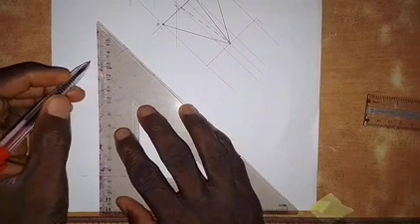So we are still going to draw a horizontal center line for the plan. We draw the horizontal center line and we draw a vertical center line. Okay, so we have the vertical center line here now.

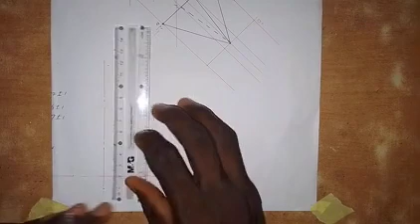So then we are still going to use the length of 50 millimeters for the rectangular base of the pyramid. So we have this is 25, we take 25, and here we also have 25, that is 50. Then we use 30 as the width, so that is 15 millimeters down, 15 millimeters up.

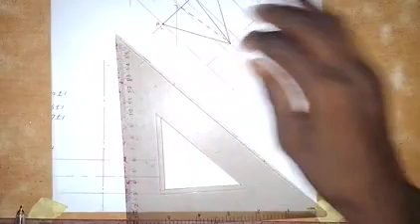So here we draw a horizontal line like this, and then coming up here we draw a horizontal line like this, and then we draw a vertical line here, making it a thick line at once. So we have this, and then we have this. We also need to make this line a thick line here, and also make this a thick line here.

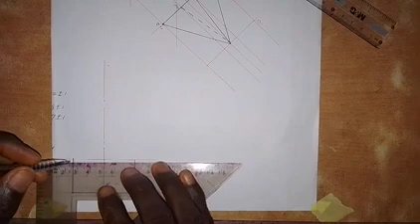Alright, so the next thing that I'm going to do is come up a little bit and draw a horizontal line here. So then the height, so we used 50 millimeters for the height of the untruncated one, so we still take it as 50 millimeters here.

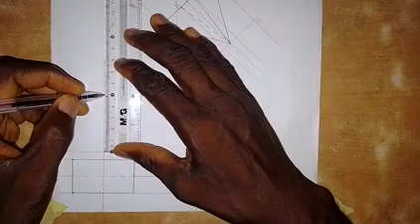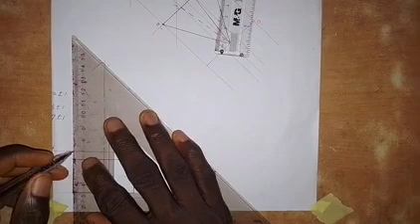So then we need to take this point up like this, and also take this up. Then we connect this point together. Okay, then we also connect this point together like this.

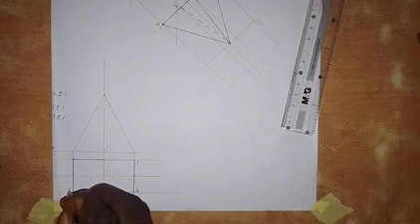Alright, so the next thing that we are going to do, I will number this point as point 1, this is point 2, this is 3, and this is point 4. So here we have 1 prime, 2 prime, 3 prime and 4 prime. So this point I will call it point 0, or point O.

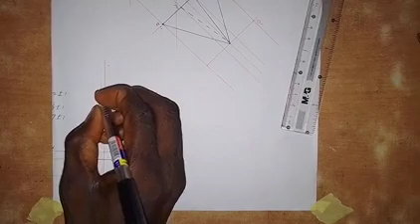So then we also need to connect the diagonals together. So we connect the corners together. So connect this with this, and we also connect this together, so with this.

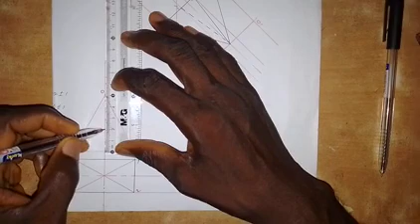Alright, so now if it is truncated, let's look at the point at which it is truncated. So let's take a measurement of 20 millimeters from the base. So then we need to locate that point on the slant side here on the left side. So we have it here.

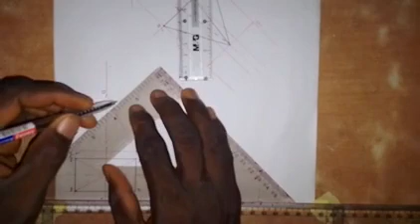So let's say the cutting plane is at 45 degrees to the horizontal. So I will draw the cutting plane like this. So this is the cutting plane, and that part is cut off.

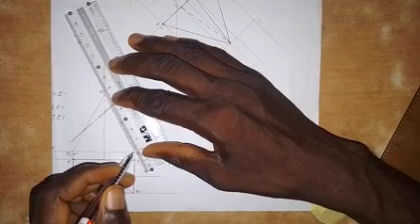So we will need to make this part a thick line. Okay, then this also we will make a thick line, and then the base, we also make it a thick line.

So if it happens like this, by the time we take this part off, we are going to see the cut part in the plan. So let's show that in case you are asked to produce a complete plan of that truncated rectangular pyramid.

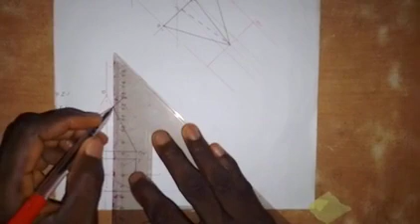So let's show it here in the plan. I will draw a vertical line here, and a vertical line down here. So if you look at the cutting plane, this is line 1 and 2. It touches 1 at this point, it touches 2 at this point, it touches 3 at this point, and it touches 4 at this point.

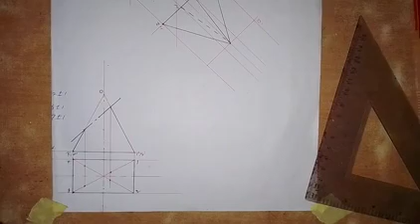So make these lines thick lines. Okay, so we make the thick lines and we connect. So we connect 1 and 4 together, and connect 2 and 3 together.

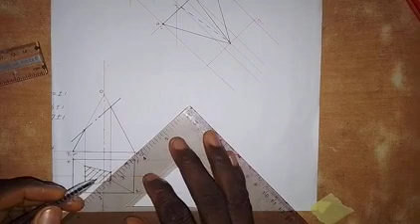And then we hash this surface like this. So we produce hatching lines on this surface. Okay, so we have this. Now that is the complete plan.

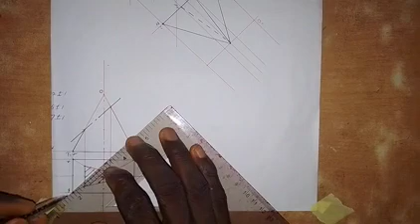Now let's go and produce the auxiliary elevation as we are asked. So the object is being viewed at an angle of 45 degrees to the horizontal. So the angle is 45 degrees here, and the arrow is at 45 degrees to the horizontal.

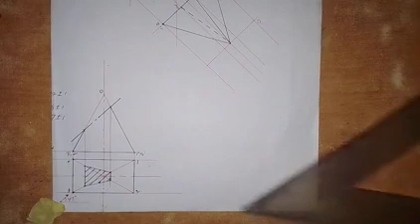So I need to draw a horizontal line here. Okay, so this angle is 45 degrees to the horizontal. So we need to use our 45 degree set square to produce a line, or to project a line from this point, this point, this point, and this point. Okay, so we draw like this.

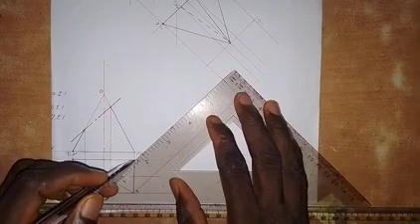And coming to this point, we also draw, and then coming to this point 3, so we draw, and coming to point 4, so we draw. Okay, so we draw like this.

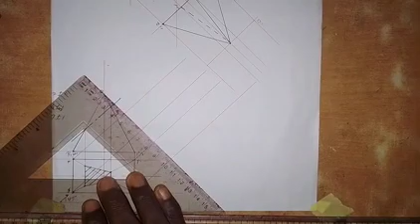Alright, so then I will move away. So with the 45 degree set square, draw a perpendicular line to this line. So I will draw like this. Okay, so here I will call this point.

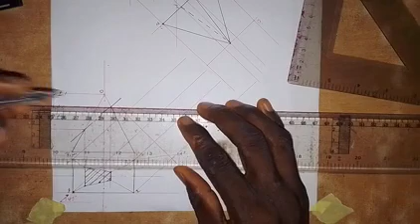So this point here, I need to draw a horizontal line up here. Okay, so then also at this point, I will draw a horizontal line at this point, and also at this point I will draw a horizontal line. Then we are going to draw a vertical line like this. So this point I will call it point 0.

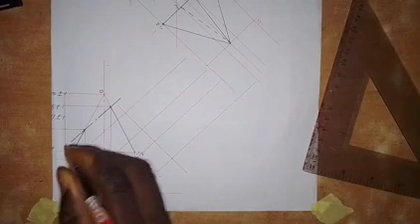So this is point 0. Okay, this point I will call point 1. This point I will call point A, small letter A. This is point B. So this point is point C, and this point here I will call point D.

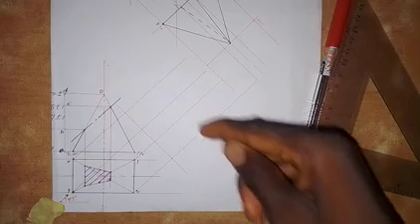So we need to locate these points on this part where we have to produce the auxiliary elevation. Starting from here, this is point A. Let's take note of that. Then point B, so from A to B I will take that distance and put it at A, making an arc here. So this is point B.

Then from A to C, so we have this point, this is point C here. Okay, so this is point C. Then from A to D, so I make out this arc, so this is point D, so this is D here.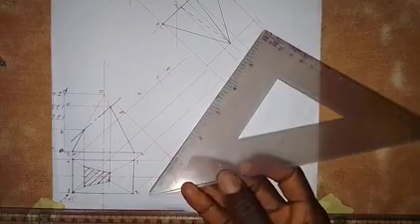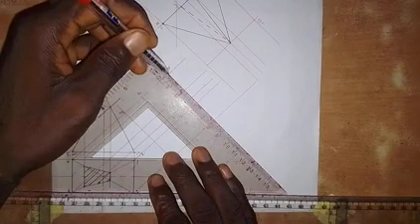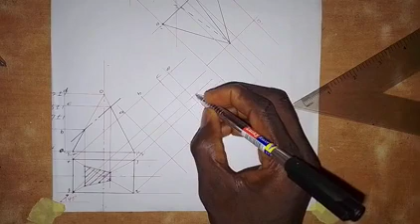Again we need to get the center, so I need to draw to locate the center here. So all these points I will transfer, to this side, and then to this side, and then to this side. So we have this. Following the center line, we have it here. That point O is on D. So we have point O, and it's on D.

Then the next thing I'm going to do, as we did before, when looking at this object I will see this surface. So point 2 is here, so here we have point 2. I will call this 2 prime prime.

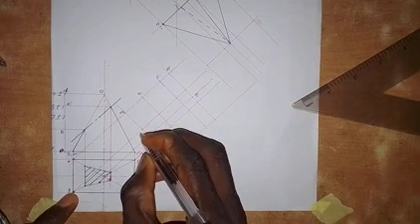And point 3, if I follow this line, I have 3 here, so this is 3 prime prime. And then point 4 is here, so this is 4 prime prime. And then point 1 is here, so according to what we did, this is 1 prime prime.

So we have this. Now if I'm looking at this I'm going to see a slant line that will be connected with the center. So I need to draw that now, joining it to the center.

And also at 3, we have a line connected to 0 at the center. And also at 4, we have a line connected with 0 at the center. And also for 1, this is where we have 1, and we have a line connected to 0 at the center.

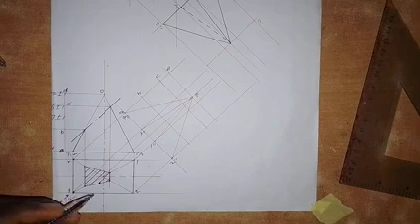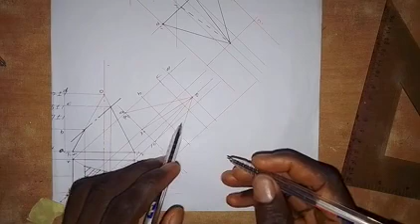So we have this. Now we need to get the truncated part. If I start from here, we have 2. Let me start with 1. So 1 is on C. So where do we have 1? This is where we have 1, and it's on C, so we have it at this point. So this is 1, we take note of that.

And also 2, so 2 is on C, at this point. I follow 2, so we have it at this point here, so this is where we have it. We take note of that.

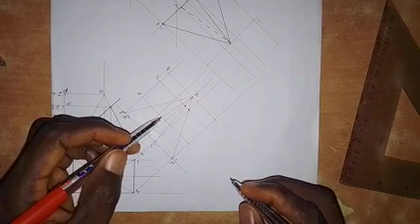Then 3, so 3 is on B. Where do we have 3? So this is 3, if I follow this line we have it here at this point. That slant line is what we are following. And 4 is also on B, so this is line 4, we have it at this point. So we are going to connect these points together.

So let me number it. This is 2, this is 1, this is 3, and this is 4. Let's take note of that. So we connect 2 and 3 together like this, and then 1 and 4 connected together like this, and so we have this being connected together like this.

So then we need to draw this line, so we make this line a thick line. We also make this line 1 hidden at the back, so as we did for the first one that was not truncated, we draw it with a short dashed line like this. And then 3 we make a thick line like this, and 4 we also make a thick line like this.

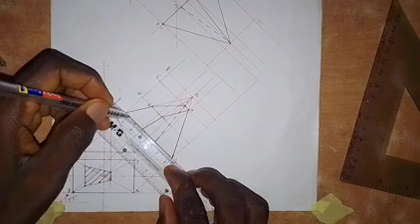And then the whole of this line will be made thick from here to here, from 2 to 4. Then we need to hash this surface, to show that it's a rough surface, that it's been cut off.

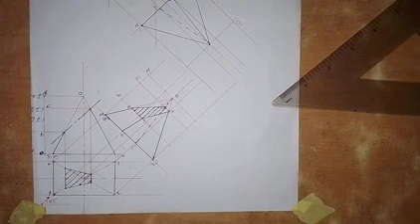So this is how the auxiliary elevation of this truncated square pyramid, or truncated rectangular pyramid, will look, as simple as I've done it here. All you need to do is practice. When you practice it, you know it better. Thank you, and God bless you.